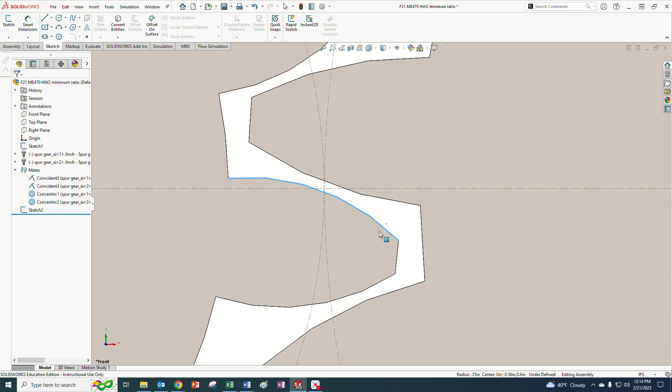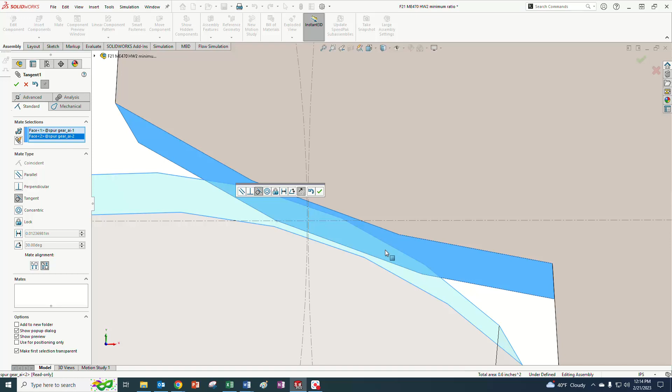You can do this, what I'm about to do. There are a couple varieties, but we really only want to have the two gear pairs in contact with each other. We want to make sure they are contacting each other. One method is to add a mate, which is what I think I did previously. In assembly, go to mates, click tangent ahead of time, then click this face and then that face. These should now be brought in contact with each other, even though they don't look like they're in contact.

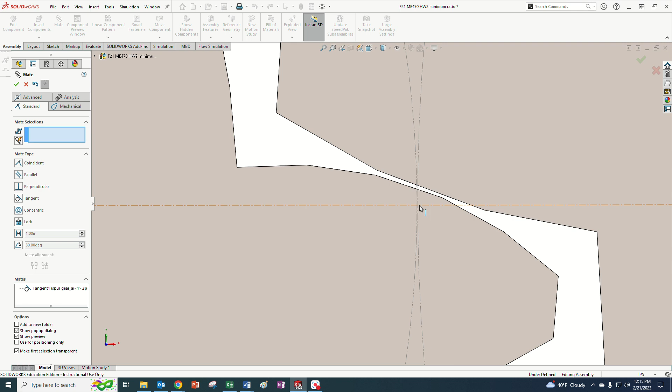Another method is to take these curves and add a point in the sketch laid on top of this, making sure this curve was coincident with that point, and that this curve right here was coincident with that point. But I think we're going to be okay doing it the first way.

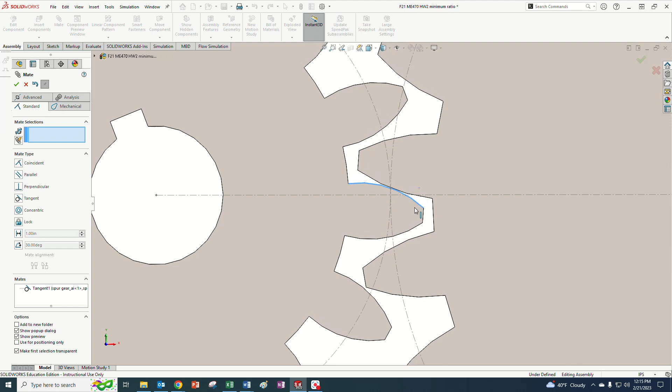So you could do it either way, but just don't have another pair close to touching each other. For instance, if we had a pair like that, close together, I don't think it'll be okay. We don't want that pair in contact. I'm pointing with my finger, which doesn't make any sense, but that's the setup we want to make sure we have.

Some people didn't have that set up that way, which was part of the instructions, but that's okay - that's homework 2, we want to fix that.

Now we want to go into SolidWorks simulation. You might not have that activated, or it might not be available on your version, so you might need to transfer these files onto one of the computers in the lab to do this. Let me know if you don't.

So we have these add-ins right here. I'm going up to the gear up here and going to add-ins, and we want to come down and see SolidWorks simulation. I already have it checked, and you can also make it start up every time. So if you have that, this tab will be available to you, SolidWorks simulation.

We can go to study, and there's a bunch of different choices. Some of these might not be shown on every student's version, but the one we really care about is static right there. Actually, the 2D simplification simulation might make more sense in terms of computer power, but let's just stick with static and go with the 3D to see if it works.

So you'll see we have another tab here at the bottom that says static 1, and we have a tree. This tree, we'll just follow it logically downwards, and we start with parts. You'll see that we have two solid models right there inside the parts.

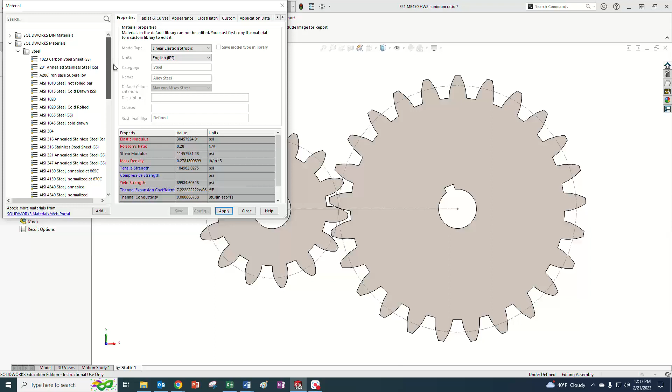This dialog box shows the material properties for a bunch of things, but we don't really care about most of them, at least not the ones we care about, which are the elastic modulus, the shear modulus, and Poisson's ratio. Those are the ones we really care about. If you want to change the units, you can, just to see what the numbers are, but it doesn't matter. The computer knows what system of units you're working in, and it doesn't really care.

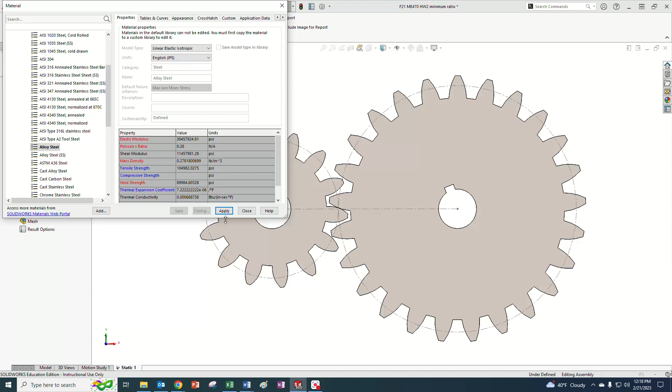So I'm just going to pick the alloy steel, why not. But you can see there's a bunch of others, so you could explore for yourself. All you need to do is hit the apply button, and you should be done. You can see next to the components here it tells you that you've picked a material.

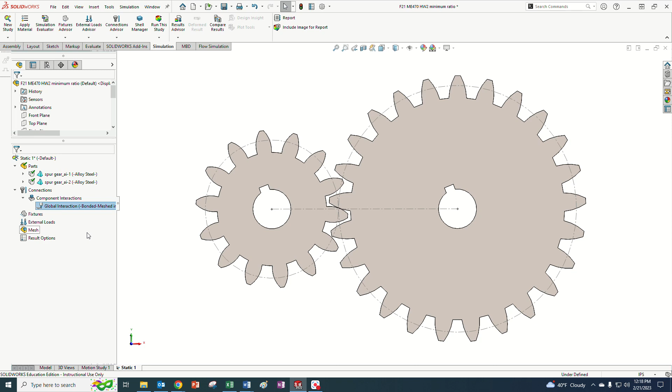So once we've assigned the material properties, we're done with this, and we go down to connections. The default connection is to globally bond something, meaning we've glued these together. But what we really want is to make sure these two are separate objects that can't pass through each other. So we edit this and select contact instead of bonded. What this does, simply, is create little elements you can't see, called gap elements, and they act like a switch.

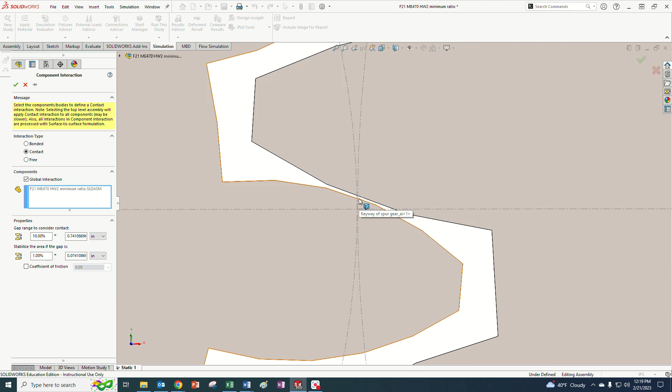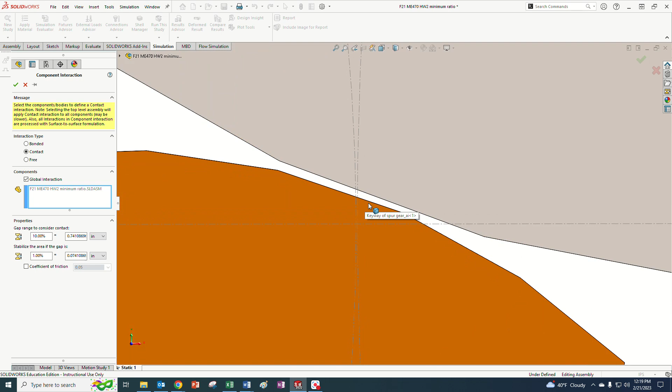They exist, for instance, if this thing starts crushing, it's going to get flatter and flatter. Initially, when there's a curvature, it's really only touching at one point, or a line across the face. But as we know with contact stress, the bodies in contact will begin to deform and become flatter, so the amount of area in contact with each other will increase. For that to happen, there needs to be a little switch that turns on, and this contact setting does that for you.

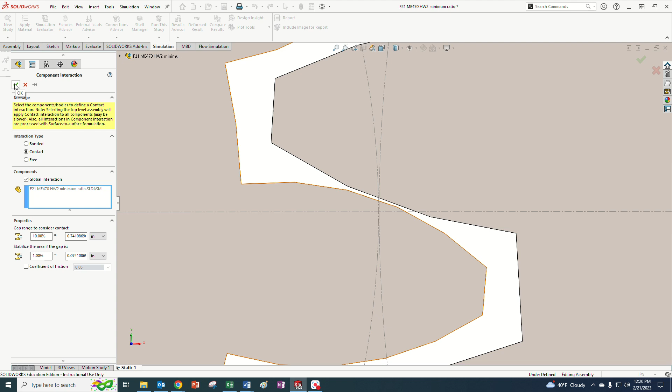In other codes, we might have to actually place those elements or do a bit more work on top of them, but that's neither here nor there for today. We're just going to go ahead and use the automatic contact feature here. So we've taken care of that, and you can see it even looks like a little cam and a roller, right, since these are typical things that have contact with each other.

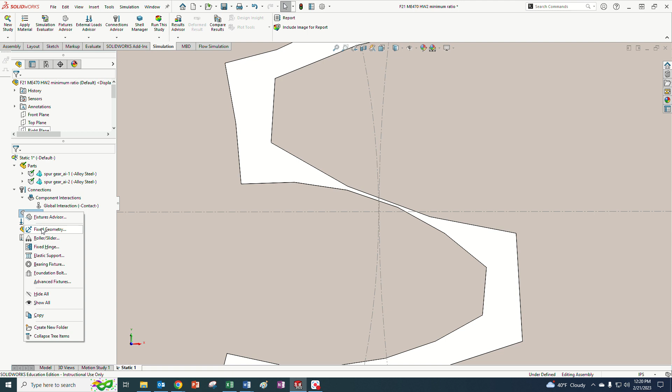Now we go to fixtures, so we have to make a couple of choices. I'm going to go with the fixed geometry option right here, and we're going to fix this shaft. So this one's going to be fixed, and let's just accept that.

Now I'm going to do the fixtures again, and I'll pick the fixed one, but go advanced instead. So I'll go advanced, then cylindrical faces, and pick this face right here. Now, what I want this to be able to do is rotate so I can apply a torque to this, but I do not want to allow it to shift.

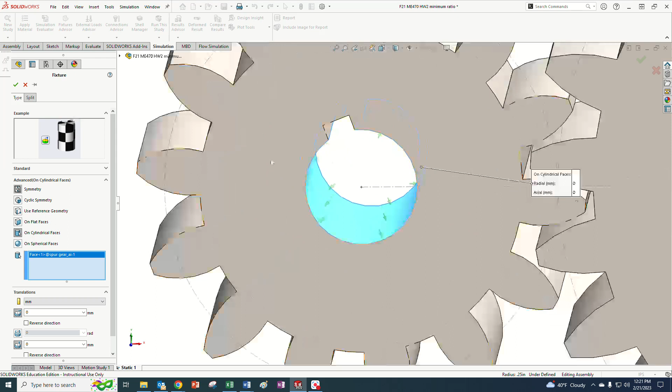As you'll see right down here, we don't want it to shift back and forth in the Z direction, and we don't want it to move in the X or Y direction either. But we do want it to be allowed to turn about the z-axis. So we will fix it that way, right there, so it's not going to go up and down, left and right, whatever. Then we're also going to stop it from moving in the z, but we are not constraining that rotational degree of freedom right there. So now we've taken care of fixtures.

Now we go to external loads, and I should have calculated ahead of time what load I want. So I'm just going to use an example load, right-clicking and going to torque, and I'm going to place a torque onto this face right there.

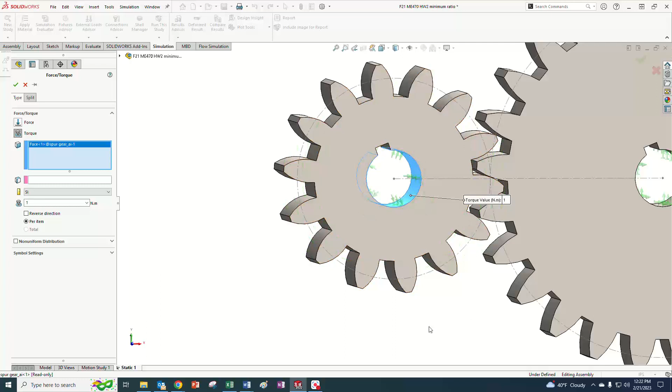So that's going to be like the shaft applying this. And then I also need to have a reference, and we could use an axis if we had one in the center.

But I'm just going to go ahead. It'll accept a round face, right? So because it's round, it'll know which direction you're talking about. And you can kind of see the preliminary arrow, or it would be nice if you could see.

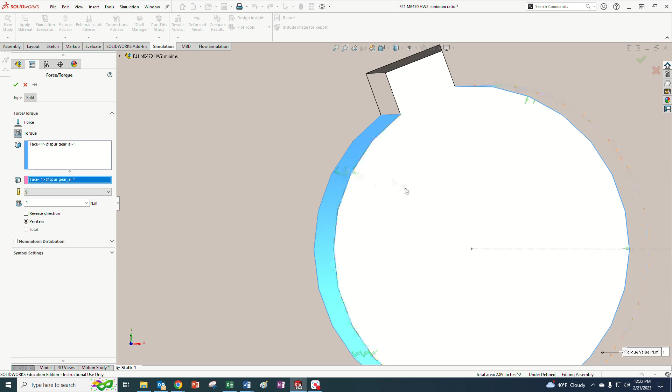I'm not sure if those arrows represent the rotation. So hovering over this, you can see the default is counterclockwise, which is good because this gear tooth needs to be pushing against that gear tooth. So the pinion needs to be pushing against the gear.

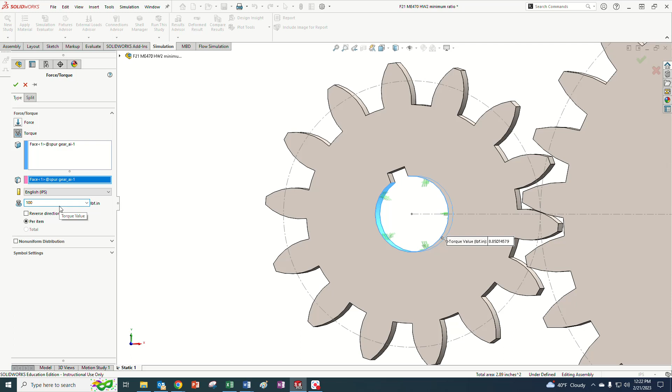We'll change the units, and I'm going to put 100 inch-pounds in there. I'm not sure if that's a value that's going to give me any kind of meaningful stress, but we'll go ahead and leave it in there.

But you should calculate what your load is going to be, in inch-pounds, for the power limiting power that you have for your gears.

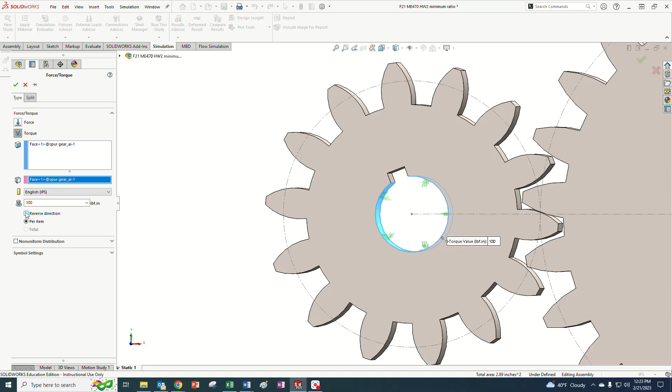And then if you need to reverse the direction, by all means reverse the direction, but you want it going in a direction that will push on the gear instead of trying to pull the gear. And so we'll accept that. Now what we have is a model that's almost ready to go.

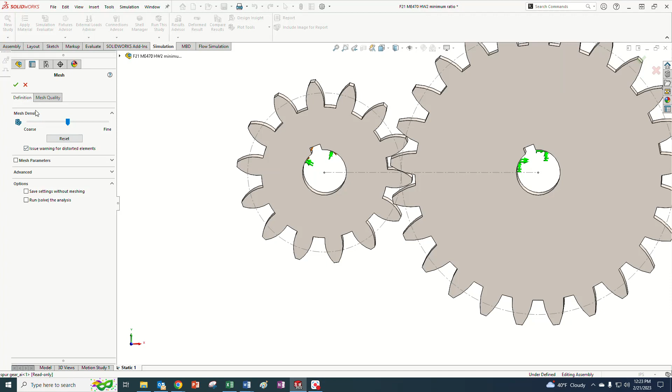The next thing we want to do is mesh. You notice we're going down this list and we're going to mesh. I'm going to create a mesh. I'm just going to create a crude mesh and see what happens. It may or may not work.

All right, so I'm just hitting this, and this is just a rough mesh. You can see that's not a lot of elements right there. We really would want a lot more elements, especially right here in the contact zone where we're going to have high stress, probably on both pieces right there. So we want to be able to learn something from this.

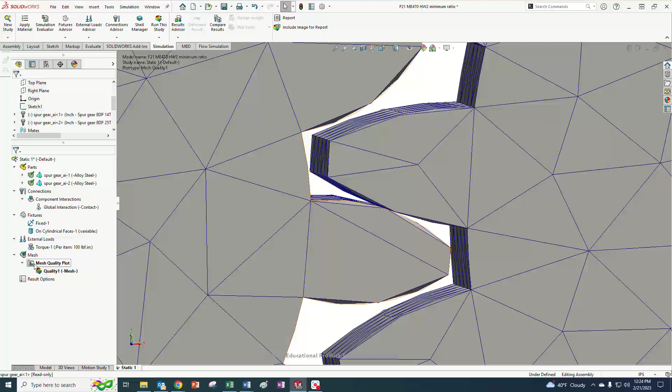So I'm not sure I want to accept this mesh for this. It might actually crash because, as I mentioned, those gap elements need to be in there, and they need nodes in order, and the nodes on both sides need to be near each other. So because I don't think it's going to mesh, I don't think it's going to run. I think it's going to crash.

Well, let me see, I'll just go ahead. I don't want to waste too much time. It's going to set this thing up, and... oh, there it is. Okay, so it gave us a solution. I'm not sure that solution is going to be very good.

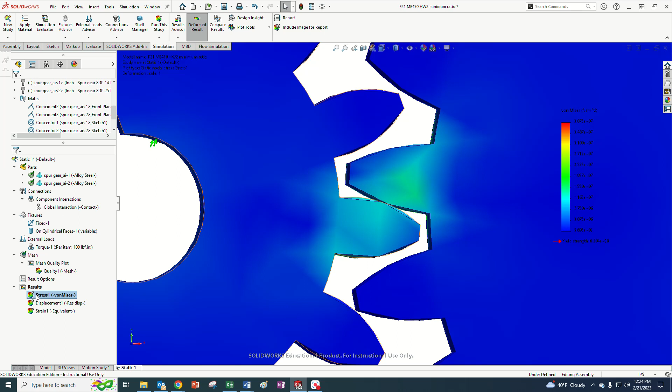I'm going to set up my stress while we're here. I'm going to set up my results. Okay, so it gives these results, but I'm very particular in how I want to see the results. So please follow these guidelines as I bring them up.

The default is von Mises stress. That's great, but the units are newtons per meter squared, which is a Pascal, right? We would prefer to have KSI because we're dealing with US units. It also does a rainbow contour plot where it goes a smooth transition from one color to another. I don't like that at all.

And then it has these random numbers. I don't like that at all. So I want you to edit the definition. This brings up the edit definition, chart options, and settings. You could click any of these and they will come up with the same thing. You'll see there's definition, chart options, and settings.

So under definition, we could change it to different kinds of stress right here, but von Mises is the default. We can change it to KSI. That's good. And then we can make the deformed shape of the thing change.

By the way, it hasn't updated what it's showing yet. I'm going to go ahead and make some guesses for the range, and I'm not going to show the maximum and minimum since that's not really what we're interested in. But I do want to take the minimum value and the maximum value. We don't know what that is yet, so I'm going to set it at 100... no, probably 10 KSI, since it's probably not going to be very high. And then I'm going to make the minimum 0.

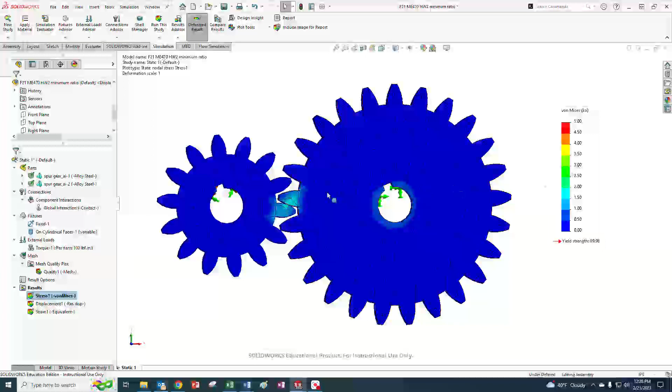There you go, you can see 0.5, 1, 1.5, 2, 2.5. So we're getting a better appreciation for this stress, but now we need to maybe ramp this up a little bit.

Before I go further - well, I could have done this later - I am going to actually make this, let's make it something like 50 right there. Okay, so 50, and make this 0 right there. So all you see is blue because we're all below here, but we're going to update this torque and let's make it 1,000. I don't know if that's going to be good or bad in terms of the values.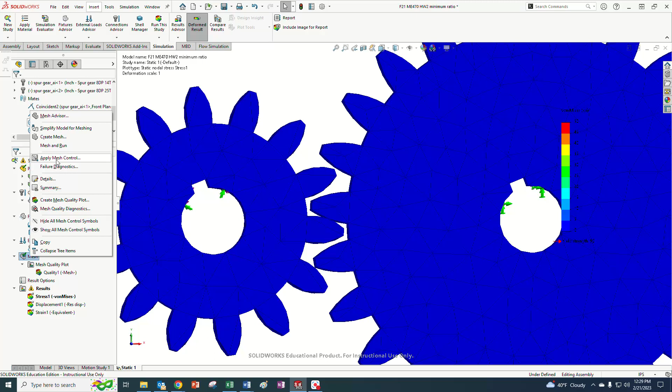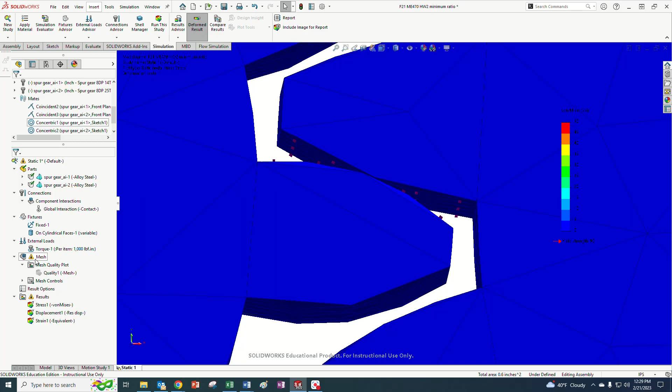And then lastly, I want to go to mesh, and I'm going to add in apply mesh control, and I'm going to grab that face and that face, and just swing it all the way to fine. You can keep making it finer by reducing that increment right there. We'll make that fine. I'm going to do another mesh control, apply mesh control, and go to places that really matter - right there, right there, right there, and right there. And once again I'm going to just take it and make it fine. I could even make it smaller if I want to.

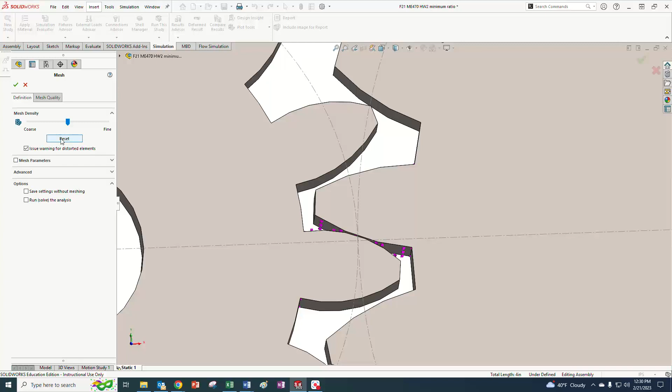And now I'm going to go to mesh here, I'll hit right click mesh. I can create mesh, I can actually do mesh and run, but I like to do it and see it. I'm going to leave the coarse mesh onto the outside, and let's see what our mesh looks like. Hopefully it'll go. All right, so we've improved our mesh. We could take it down even more, but this is maybe better. We should probably do a little bit more refinement, but let's see if we can make it run.

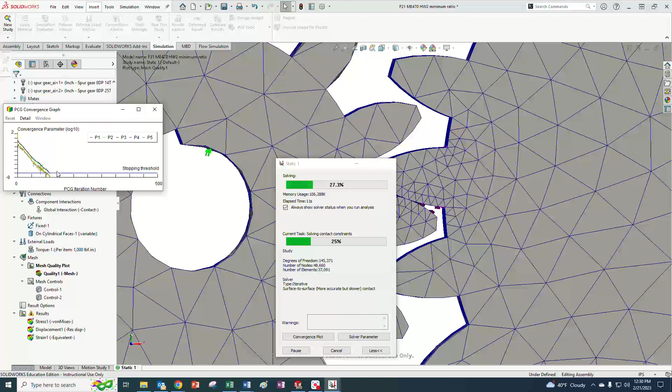If it takes a long time, you can hit this more button and watch this convergence plot right here, and it'll give you something to do while you're waiting for the thing to solve. But there you go, so it's solved. All right, cool. We might come over to these controls, and can we hit the?

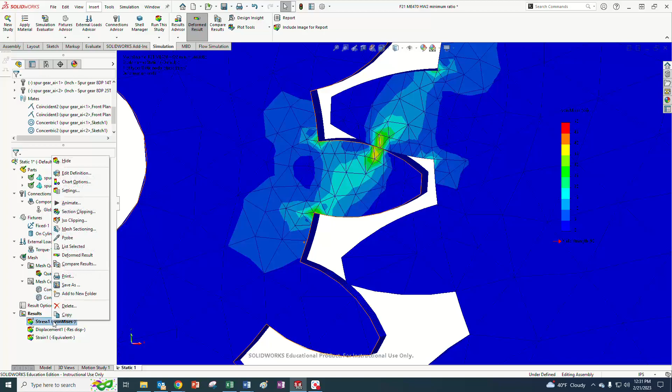We can hide the controls because this is making little purple things. But you can see now some more of the effects of this stress placed on here. Let's go to chart settings again and make it 25 instead. I needed more decimal places in there, so let me go back and edit my definition to 1 decimal place.

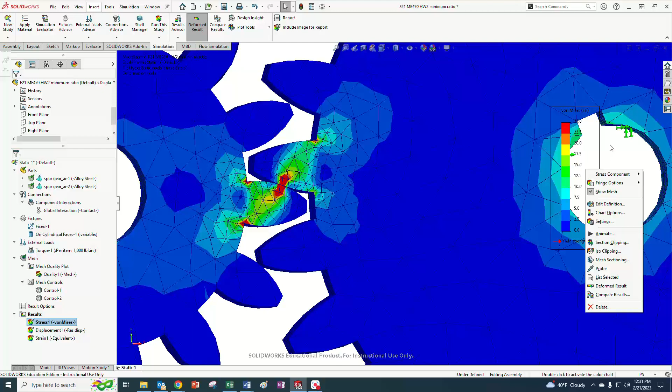It'd be good if we had the background to this. Can we set the background? I think I can, but you can barely see it when these are out over here. But you can see what the values are. So this right here is a pretty decent observation of what's going on with the stress in a gear.

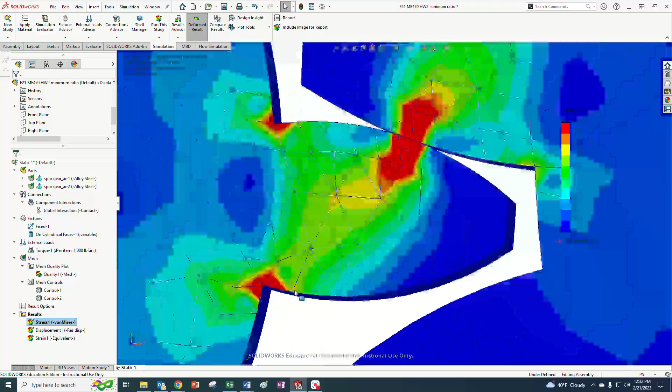You see it didn't take me very long to do. But I can mess around with what I chose for my controls right here, okay? Because the number of elements around here are probably not enough to really give us a good sense. Because you can see right across one element, there's a large amount of stress change, at least according to the scale that we're using there.

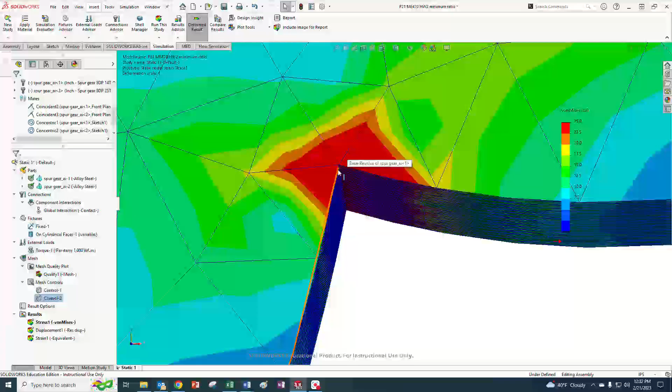So this doesn't have a fillet radius to it, so that's one of the reasons. This is a very sharp corner, so that's a stress concentration, unlike what we'll have. And this right here, these are representing the contact stresses that are taking place between the two gears.

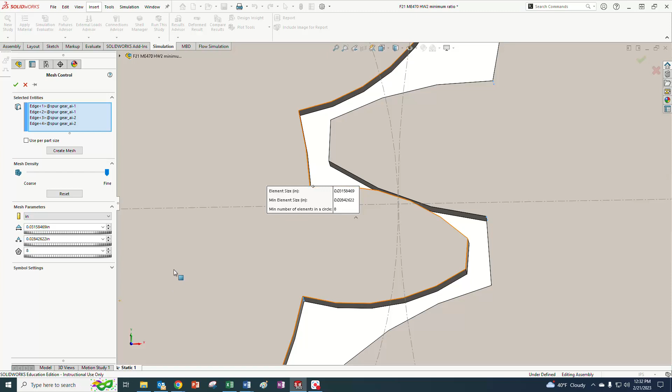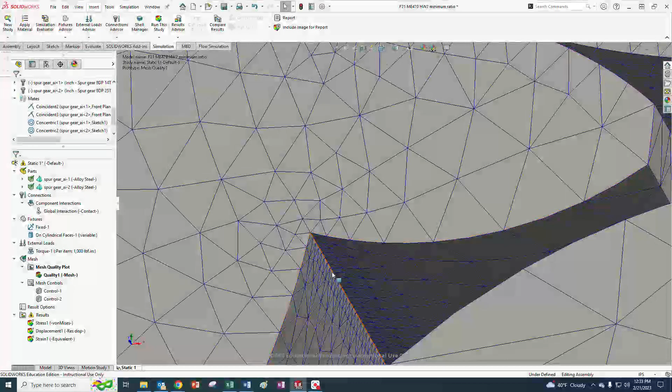So what we could do is change this right here, and I don't want to go too much further, but we could try to change these. If you go too far, it'll start crashing on you, just to let you know. But we will go ahead and try to see if we can get some more elements. See, not great right there, but it's better. And then you can run it and see.

So it's doing all this stiffness elements. It's getting... it's created the matrices, the stiffness matrix, and now it's doing the iteration. Now it's doing the contact constraints, right? So there's those contact elements. You see, it's solving contact constraints, and so it's really kind of doing an iterative process where the pieces are deforming, and so it has to recreate a stiffness matrix each time, and now it has solved.

So you can see now it's got sort of an interesting looking thing. You have to remember that this is a tool, and this is not the answer to what the stresses are, but we're getting a better sense of how the stresses are distributed, right? And remember, stress is the distribution of internal loads, so this is what we've collected.

Now, displaying this or providing this for at least the assignment, here's what I would like you to do. You can go to View and Screen Capture and just do Image Capture like that, and then place it into a Word document.

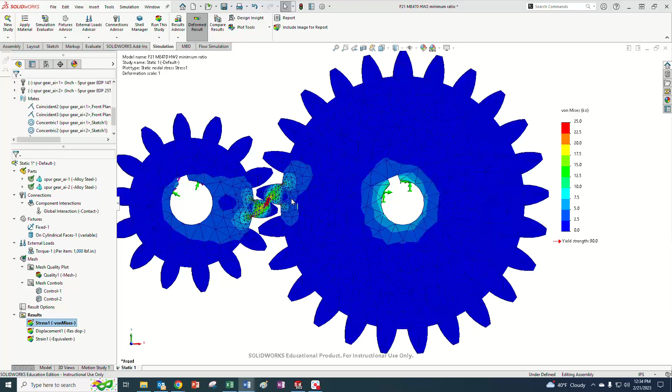Boom. And maybe you can do image capture again, like this right here.

What's good with this is that we have already put the... oh, I'm sorry, I didn't show this. All right, so I pasted this in. So I opened up a Word document and I pasted it in. It was on my other monitor. And it was already in the queue, right? Already in the clipboard, and you could just save this, and then you could write out your observations.

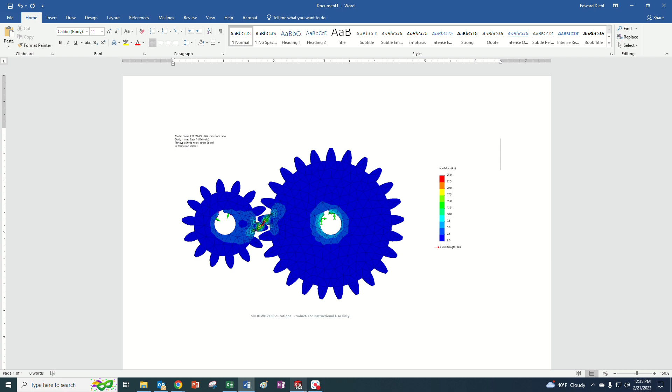You might also want to take another screen capture of this. Another screen capture, and pull it in and put it right in there, right? So now you have the big picture and it has the scale. Actually, you could read the scale pretty well right there.

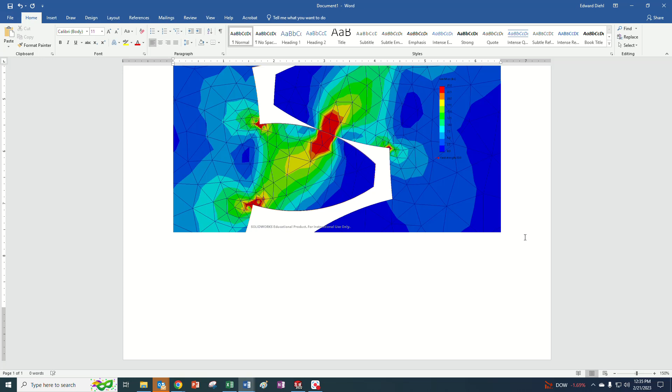And maybe in here, write in what I've asked you in terms of your observations about the gear stress. And that will be sufficient for getting an introduction to using SolidWorks simulation and applying it to the gear. So I'll do a demonstration in class of this as well.

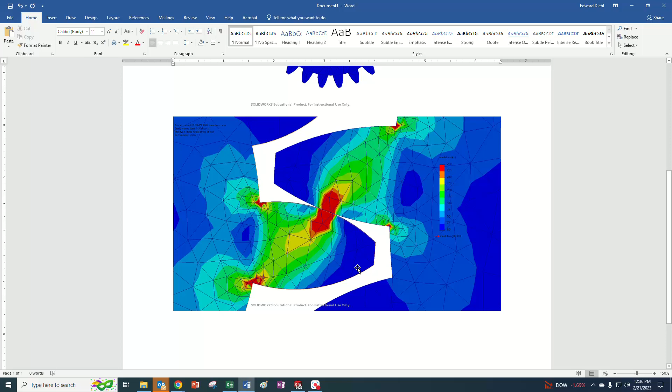So that was our video that I've created for the assignment. This is like homework 5, I think, that's coming up, where I ask you to use AGMA tools to calculate stress. But here I want you to do them using FEA for that. So we're done.